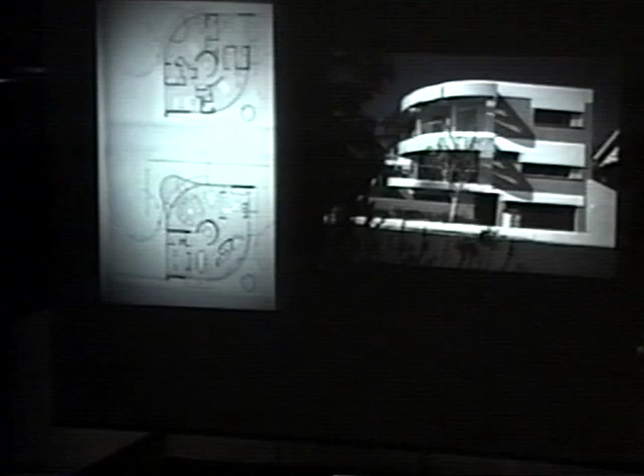Suddenly these things have become quite readily available, and I think they give opportunities for enlarging volumes and giving emphasis to some parts which would have been almost unthinkable before. The forms of houses, as a consequence, can also become much freer in choice of curvilinearity and hollowing of the form, penetrating vertically.

These are reinforced concrete floors, but pre-stressing is also used to obviate the inevitable old problems that concrete used to have. And as I mentioned, our climate gives us a problem with sun, so if you use very big areas of glass, it's irresponsible, to say the least, not to protect from the sun.

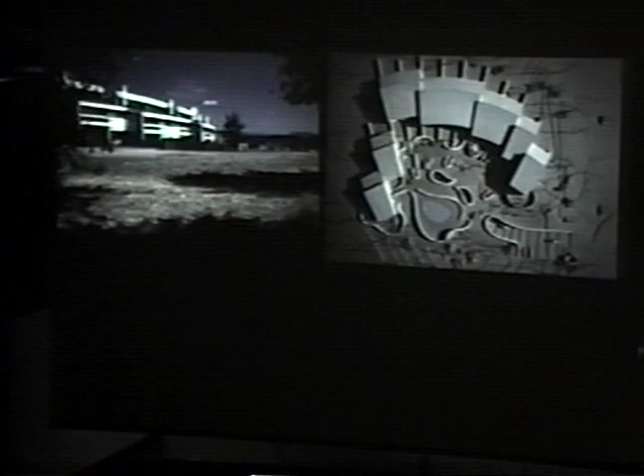Row housing, I think, is something not only logical and economic, but distinctly Australian, where this was a form of urban housing that I think has a language appropriate for today.

Here is a group of houses on a site where all of them look toward the sun—our sun is on the north, the equivalent of the south here. That doesn't mean those houses need be minimal or have anything to do with the traditional form. It's possible to make houses that have a spatial freedom and openness inside quite economically, relating different levels in the house together and giving excitement to something that's really a very economical habitat.

I think what's important is to say something about this kind of housing and planning, which has its roots right in this school—well, not exactly this building, but in Robinson Hall. That's where the action was, very nearby here, through the teaching of Martin Wagner.

Little is known about this man. He was quite a simple fellow, but not by his works. If you look in the books of what he built in Berlin and Frankfurt and other cities of Europe, you will understand.

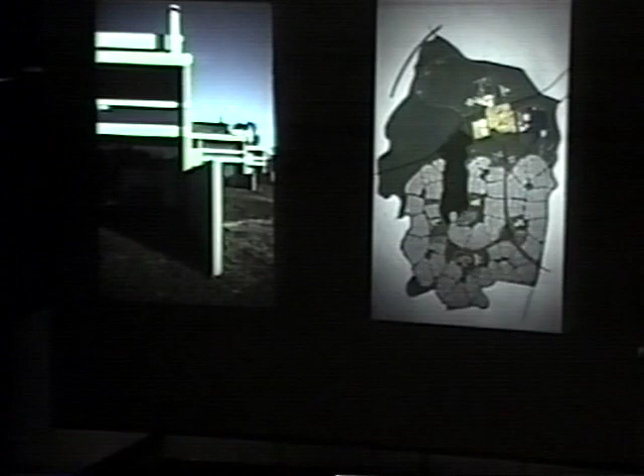Now, this pattern that we developed for Australia really emanated from his notions—that if the Anglo-Saxon world wants to live in individual houses, it's best to arrange those along cul-de-sac streets, so as not to have children crossing streets and hazards of traffic, which is delegated to go around such a suburb or neighborhood unit, as we used to call them here.

And that should include some of this kind of medium density housing, plus the little shopping center and the primary school, kindergarten, and so on at its core. So every housewife can take a child in the pram and go shopping without crossing any streets, and children can go to school the same way.

Now, this emanated right here. There's very little of that being done, if any, in a world dedicated to the quarter-acre block of land, where everybody lives in the suburbs. But a mix of densities—introducing low density of 12 people an acre, or 35, and high-rise buildings where housing can reach 150 people an acre if necessary—is needed.

Now let's switch tack and talk about the city, a sphere in which I've been largely involved ever since the 1960s.

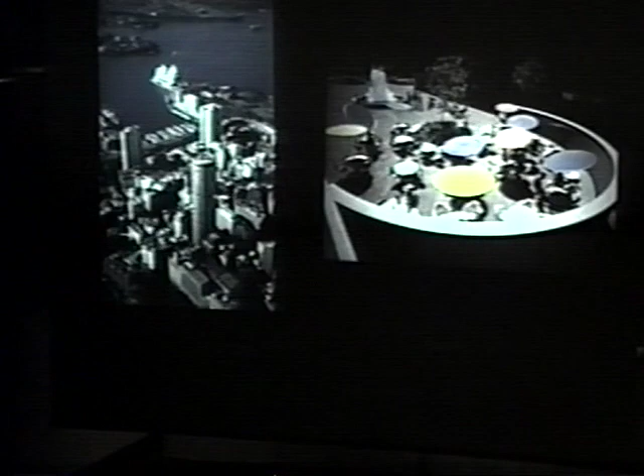Food has to be accessible, with tables and chairs and umbrellas, and you've got it going—because then when you add water and trees, people will want to sit and linger and like it. That's a formula I think I've found works extremely well.

Let's look at this round tower that was the result, going back to 1963. Sydney looks very different since then. But it was my fortune, through Breuer's office when he was building the UNESCO building in Paris,

to meet Pierluigi Nervi, who I invited to be a consultant on this building. He not only taught us how to build it, but also solved some heavily loaded exhibition floors for us, visible in the lobby from underneath through his ferro-cement pans.

There are 7 different of these very thin concrete shell elements, put on minimal formwork, and the space between them creates interlocking ribs which are very rigid. There's a kind of expression of statics here that is particularly beautiful—it's not just decorative, it reflects the isostatic nature of what actually takes place in that building.

He taught us to build buildings without external scaffolding. These forms, as you saw in the previous picture, are made out of white quartz cement permanent formwork, concrete formwork with white quartz, so that it remains white virtually indefinitely.

These forms, in 2 halves, are put up as columns, and they change shape—logically bigger at the bottom than they need to be at the top. I think that helps a great deal to give the building its soaring appearance.

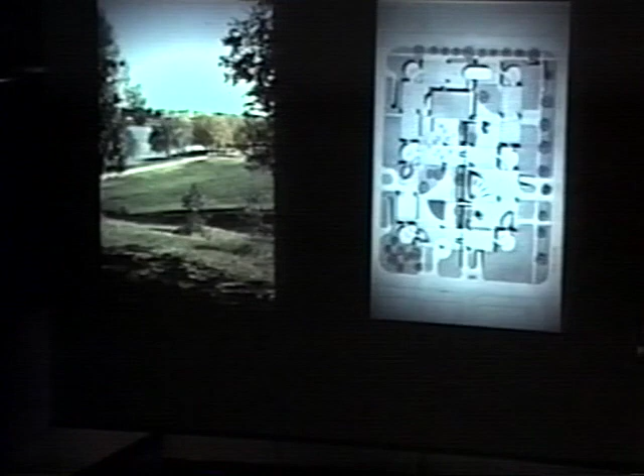And when it came to building the cores or the access to these office wings, they were made of traditional construction: elevators and stairs and ducts and so on. But the rest of it, where those 3 components were used, they were all the same.

And we built huge movable gantries, because the building was so big, it just moved along and put these 3 bits together. There's the planks being assembled, and the facade beam, which is structurally expressive, and they span about 15 meters, over 50 or 55 feet, from one side to the other, and the facade beam goes 25 meters, which is almost 80 feet.

Now, today, this would not be warranted anymore. See, 20-odd years ago, 25 years ago, there were no cranes that could pick up this thing economically. It weighs 80 tons. Today, I can ring up and order a crane that picks up 100 tons like a feather, and I needn't bother with these gantries.

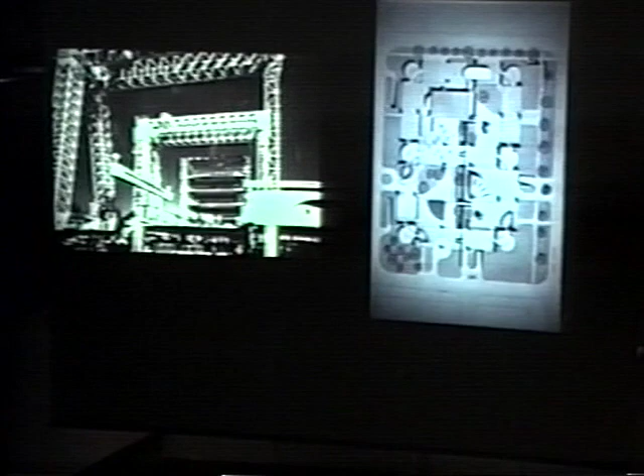And that's what I'm saying: technology, and inevitably what happens to architecture, changes. Even in our own time, within 25 years, we got tools and opportunities now that didn't exist before.

These elements were, of course, tied together. There's a facade beam, there's this core that carries the surfaces. These are the pre-stressing anchorages, which, almost like Otto Wagner, have little medallions stuck there to hide and cover the anchorages made of stainless steel.

This is the undercroft of the building, but you can see how wide open, obviously, every typical floor is by using this system.

I will say something more about the upswept nature of these beams, which is something initiated by Nervi for us. The difference being that in the middle, maximum bending warrants a T-beam. At the end, a T is a bad thing, because it's quite unstable in supporting shear. Shear at the end is best resisted by taking all this concrete and sweeping it up into a thickened rectangular cross-section, which gives the advantage that within the thickness of the floor you can run mechanical services.

Main ducts can run there and distribute between these ribs, and that's a way of overcoming the problem. Most people say you can't have long spans because you've got to hang all the ducts underneath and the building gets that much higher. It's not true. If you make the structure and mechanical services interact, you can do them both within the same thickness. In 1980, we were asked to be competitors in an invited competition for the Hong Kong Shanghai Bank.

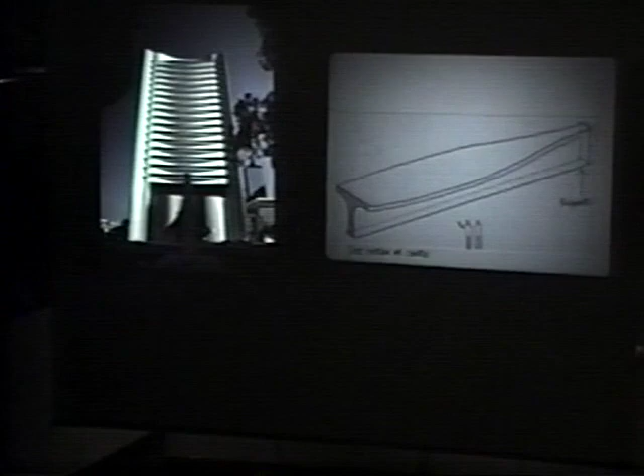Here we developed this, following on that competition, a T-beam in the middle. You can see a person there for scale, this is over 2 meters high, about 2.5 meters. The compression flange reduces toward a rectangle for shear at the end. This has got an almost Borromini-esque effect when the sun shines, but it's a clear reflection of what nature wants you to do.

There's a plan of the building that shows, because they have enormously high winds there, typhoons, these columns are turned into very rigid, lateral load resisting forms. The core is attached to the back, and this spans up to 17 meters, quite a long way, and the facade's 35 meters.

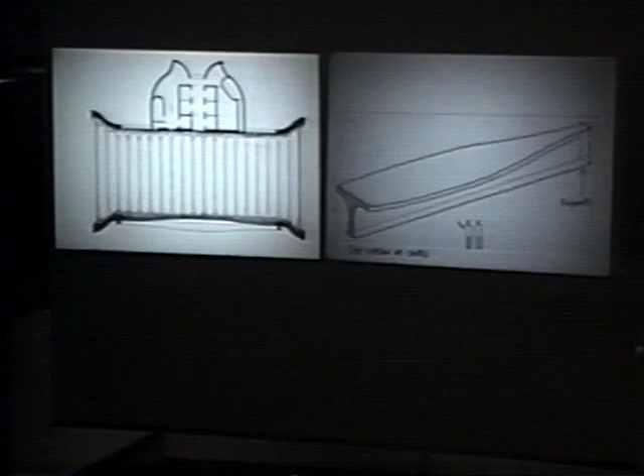But inside, the advantage is that you do get total freedom of what to do. They're all pre-stressed floors, but you can see the interactive nature of what the club wanted: halls, restaurants, lounge, and so on. This is the first office floor, again following the same principle of having the shear resisted in this upswept T-beam form.

We were asked to do the Australian Embassy in Paris in about 1973. The site was very difficult, an odd triangle, very awkward shaped thing that used to be a railway station along the river. Marvelous view in one direction, toward the Palais de Chaillot, right next to the Eiffel Tower, and a park in the foreground.

The planners of Paris said, well, you're in the historic part of Paris and you'll behave yourself in that you have to relate to the axis of the Champ de Mars or its counterpart, and we did. Our scheme was to repeat those axes and their right angle, and between them we struck quadrant shapes, because we referred to the Palais de Chaillot, which they all like, and it's on an axis and the cross axis, and it has quarter ellipses on both sides. So, you know, you did that before in Paris, so how could you be wrong if you do that?

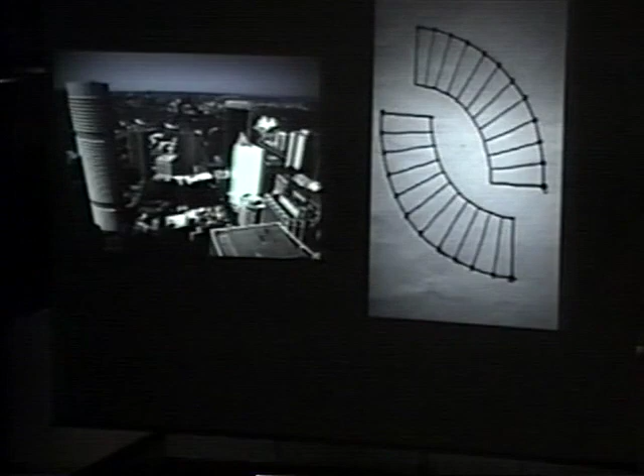And you know, to come back to this relation to art, I think there is something that happened simultaneously in the painter's world. This is Frank Stella, who was intrigued with quadrants also, and the quadrant, of course, is a form that relates to the square very readily. That happened about the same sort of time that this building went on. It's changed and does very different things now, which I'll show you later on. And I believe they also have some effect in what architecture does at any one time.

Here you can see the identical steel beams. The core goes up in concrete before, and the steel beams are all the same. Now what you pay per ton of steel when they're all the same is a fraction of when everything's different. When capricious architects make contorted shapes and order each beam and all its welding and hand-done things separately, you get nowhere, I believe. It takes too long, it's too complex. So I think there's something to be said for maximizing this sort of approach.

We have a strong sun, which I mentioned before, and in this case the full-height glass is protected by blades that are all the same, but they're fixed at different angles along the facade. They go from vertical, where the low sun hits the building, to horizontal, where the sun is high. The main thing is to keep the heat load off that glass facade and save energy. And that is a common sense thing, I think, that anybody would surely do.

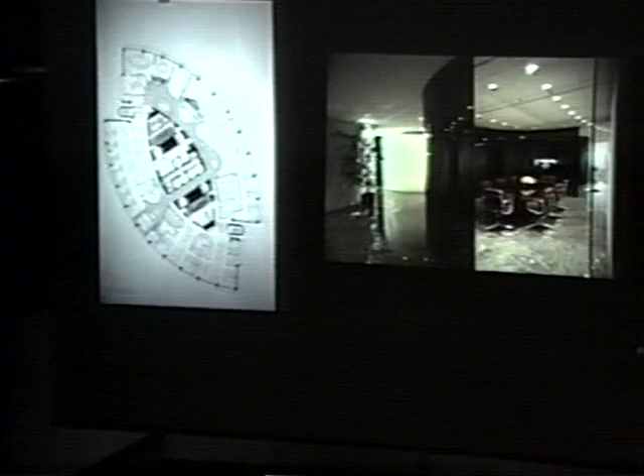I will show you some things that have had an effect on the sort of thing one does within these confines that I discussed in buildings. Here's a plan of that building that shows a 15-meter span, again without any columns. The core contains all the elevators and services.

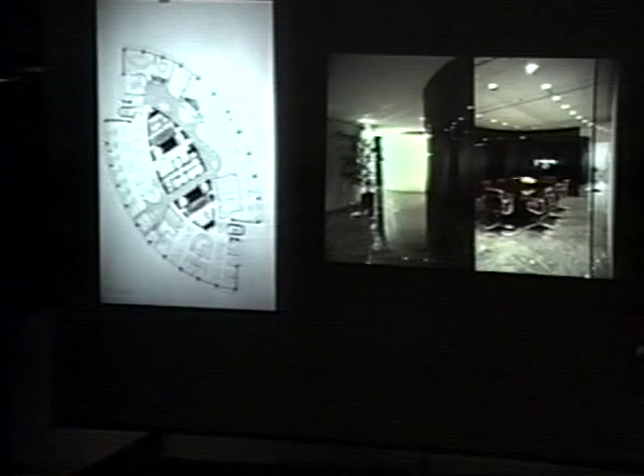Fire stairs are separate. And inside, of course, you can do what you like. You can have walls that do wild things. You can have open landscape offices. You can have boxed up offices, whatever is needed. And that's a constantly changing commodity in our world. Nothing really stays the same.

They tell me that when a tenant in an office building can see the water, if there's water nearby, as in this case in Brisbane, he'll pay up to 20% more rent. So when a developer tells you that, they say, give me as many offices as you can facing the water.

You analyze that, and you find that the best you can probably do is a building where more than 60%, by shaping it like this, look up and down the river. So it's a river with a limited width here. If you put a facade there, only the bottom people will see the water. The top ones will just look straight across and see land again. But in this way, they look up and down the river. So that's the reason for the shape.

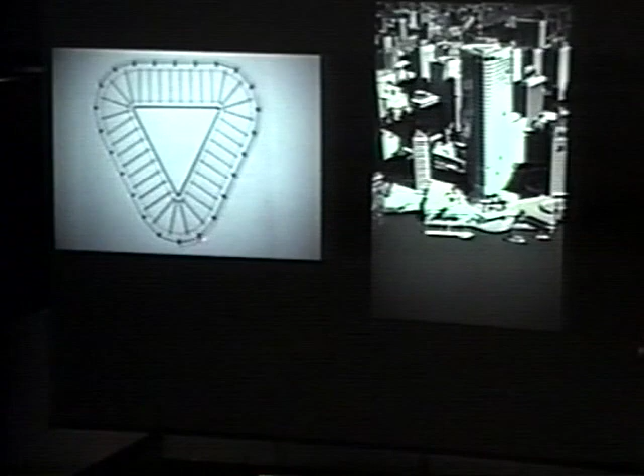This is again translated into the structural plausibility, where every beam is the same, and every facade element is identical. It looks round, but it's not. Each one of these elements is straight, the same length, and equipped with appropriate sun shading. Where there's no sun, you leave it glass, and you start the sunshade where it makes sense.

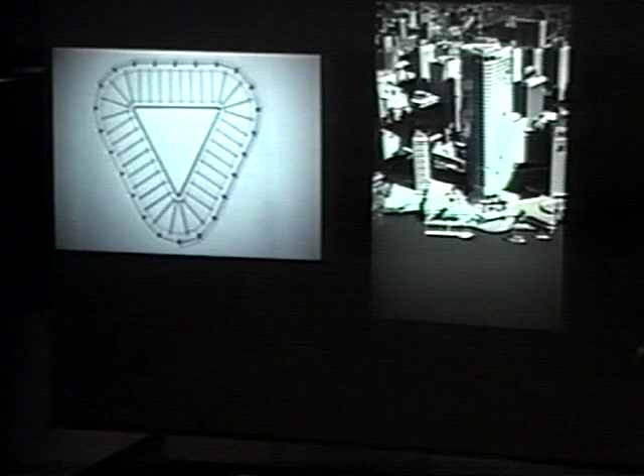But the waterfront development and the plaza around this building is what gives it its impact. As I say, removal from traffic, fountains, access to food, trees. We transplanted this huge fig tree. There's a big garage underneath, but these are great pits that are landscaped and watered and so on. You can grow big trees in a concrete environment.

Now, the desire expressed again by the client was that they want impressive lobbies. Nowadays I will show you some of the horrors that people resort to when that is posed to them in this day and age. But I think spaciousness and great big openness, and it's of course a semi-tropical climate which needs protection for people to get into the building. When somebody gets out of a taxi during these heavy rains, they need a canopy.

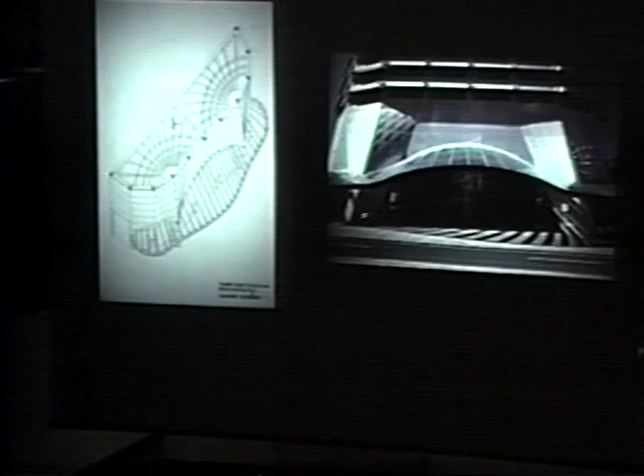And that's the lobby, and you know, this became less rigid, so these ribs brace it against the core, and we've seen something like that before.

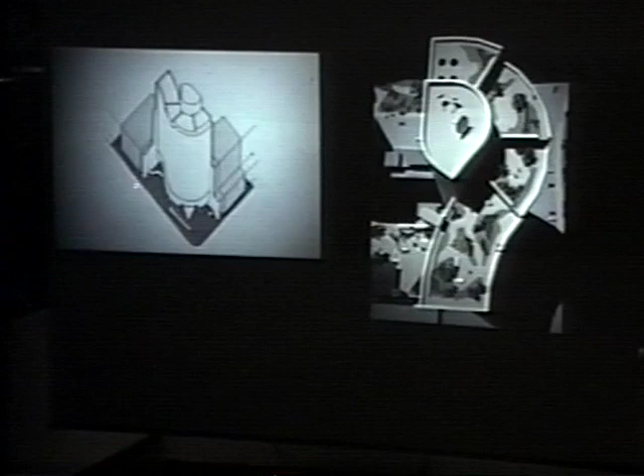Let me just say something of one of the last ones of this kind, that with the height limit in the corner of a city, the outlook was paramount. So you get more distance by curving the building around, aside from which there's a railway under this corner. And this is the shape of the building.

You would think that that's crazy, you can't do that with this sort of system, but you can analyze it to result in exactly the same expedient routine of having standardized forms that go up just as fast as any of the others. And the building looks like that, which follows the same principle.

Now, you don't always get a big site where you can do marvelous things. Here, squeezed in between other buildings, what on earth can you do when somebody says, I want a headquarters office building on this site that's only 100 feet wide and surrounded by buildings on all sides. There's a funny backyard here, which you don't know what to do with. But this is obviously where you can, it's only got one street facade. So it's impossible to cover the whole thing with buildings because nobody could have any windows.

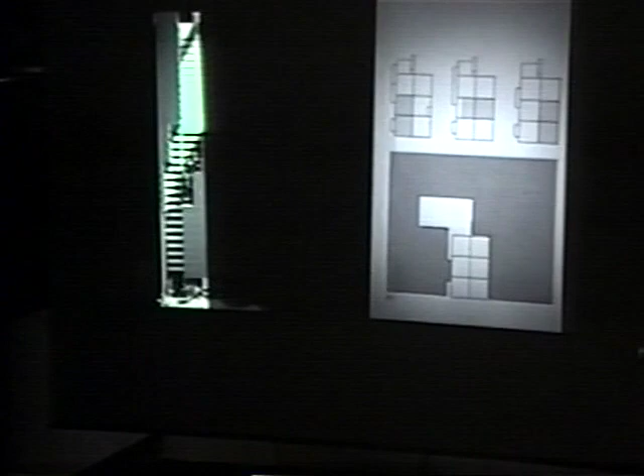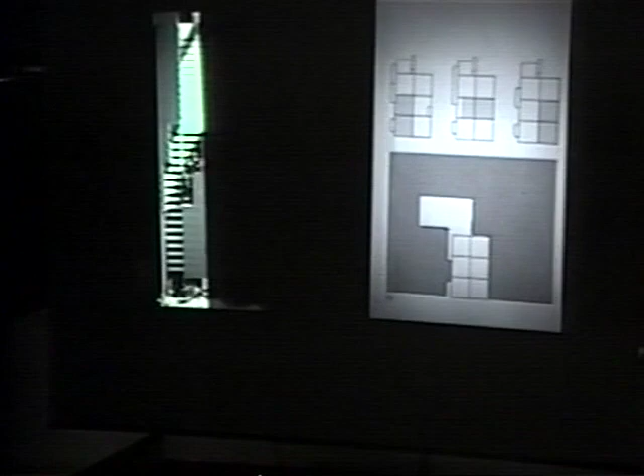So by analyzing the program, they had lots of departments which don't need all that much space themselves. We always left 2 of the 6 squares open, but in different locations. Sometimes they're at the bottom, then they step up, and the shelves that are produced there, these terraces, we planted big trees so the people inside get their own outlook because they have no other. There's only a narrow street to look at.

And that's the result, so the sun actually shines right down to the bottom through this by stepping the opening toward the sun. You can see the light coming down there. And of course, by having hollowed out this thing, it becomes all wonky and shaky.

So the engineer says, I want shear walls, and I said, you can't have any because I want windows. So you've got to brace the thing to stand up. But you can see how it's glued in up against other buildings on both sides. So we maximized the openness inside, but also by bracing it like that, we got rid of this big column in the middle.

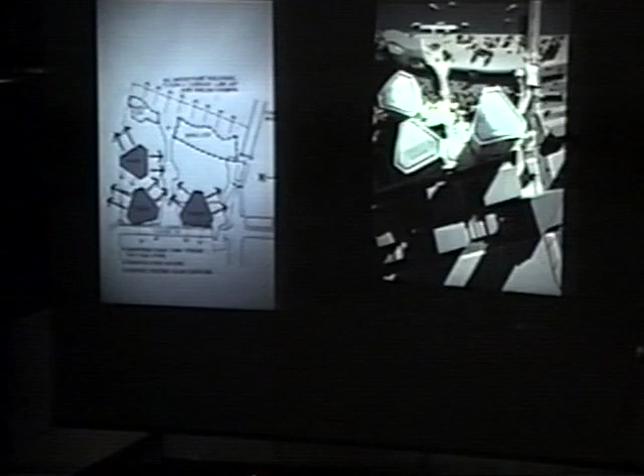And the result of that is, here it gives an impression, of course, of the fact that mechanical equipment now gets smaller and smaller. You don't need a whole floor for mechanical gear, so you cut it down and you make a form that's repeated in other aspects of the project. And this is the proposed space that connects all three buildings.

I was talking about Stella and the kind of forms and the flamboyance that has come both in his and in other painters' work. And I think this has had an inevitable effect on architecture, because aided and abetted by the improvements not only of structural potential that exists today, but also constructional devices that help us put together what previously were quite impossible things to assemble.

Here's a Stella painting of a similar time to the one that you saw in that building, in that it comes off the wall. It's become virtually wall sculpture, and the form of the building reflects this kind of flamboyance.

Let me lastly talk about what we're now involved in.

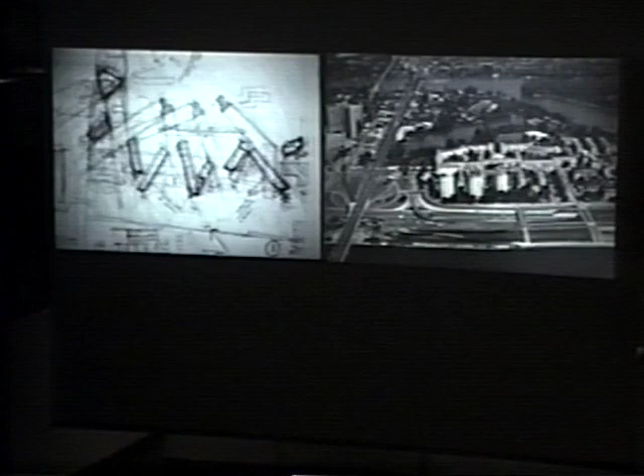Well, the first sketch I made is responding to the politicians saying, these people scream blue murder if you block their view - they're used to having a view, so whatever you build there, take that into account. You can see here the 3 buildings, and we left a view corridor so that they do obviously get some of the view obstructed, but they still see something. And we turned the buildings.

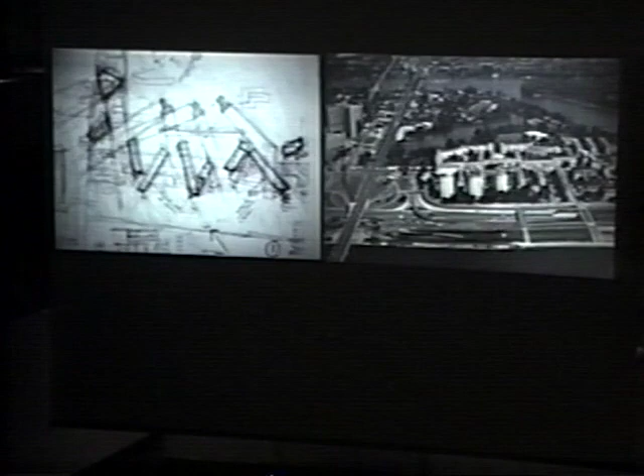Originally, they wanted us to just put buildings straight across the beams that inevitably go over this thing. It doesn't make any sense, because buildings that would go straight across would put a lot of load on one side. This, by the way, also harks back to sort of constructivist space paintings - these building forms that are exploded, separated, but floating and oriented in different ways. Now, it makes sense to turn these buildings from a construction and structural point of view, because they distribute their load over several beams instead of only one. I'll show you a picture of that in a minute.

So that's the scheme that we're building there. It's about 850 apartments, where every apartment looks at the water. There's an office and, again, an apartment tower on the area where we're not on top of the expressway. But here, because we spread the load, they allowed us up to 8 floors down to 5, instead of a maximum of 6.

The outlook we analyzed from every apartment virtually, and you can see the kind of view that people will have even if they do see the building on the other side.

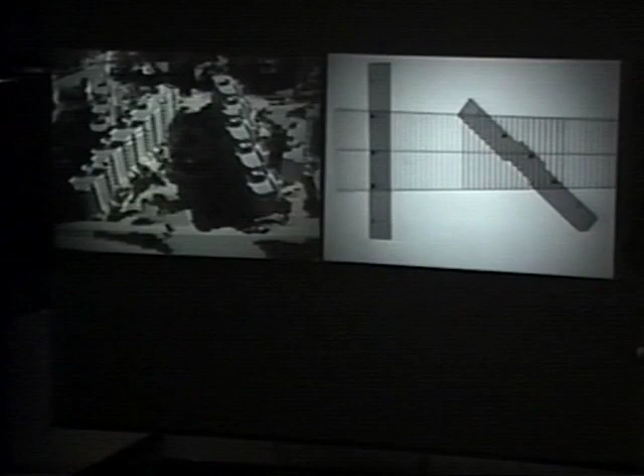Yeah, this is the principle I was talking about. Instead of putting all the load on these 3 beams, it's better to turn the buildings sideways, and this has got 19 beams that carry it. You can see how you have to fit the elevator pits in between those deep beams that span the...

They've got curious building regulations that require Brandabschnitte, meaning sectionalized offices against fire. Quite an old-fashioned notion, but you turn that to advantage and simply cut the sort of buildings that you saw us do before, with the same principle, into different forms. The top of this three-sided building has offices down here and apartments on top.

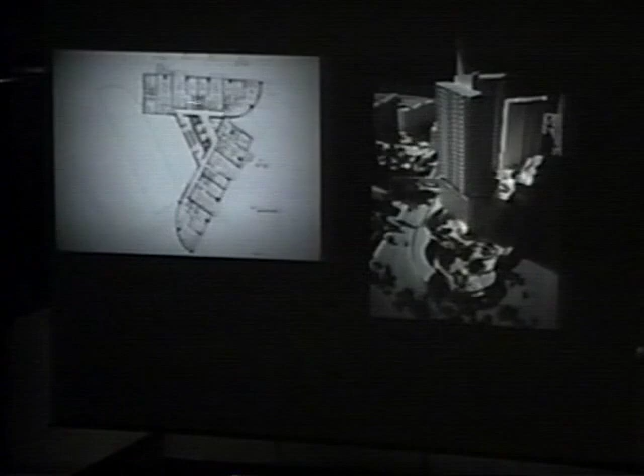These two wings looking at each other, and around the base of the tower is the shopping center. It's surrounded by traffic but shielded completely with high walls. There's a tunnel underneath for pedestrians coming from the underground station. This, again, is one of our secluded places, hopefully full of nice coffee houses a la Viennese style.

This, no doubt I believe, also relates to what William de Kooning paints in terms of its forms. Utzon's daughter - Utzon designed the Sydney Opera House - his daughter is an artist, and each of the buildings has an artwork of hers in gold and aluminium, so as to give a distinctive aspect to each building. This is what's going on there now.